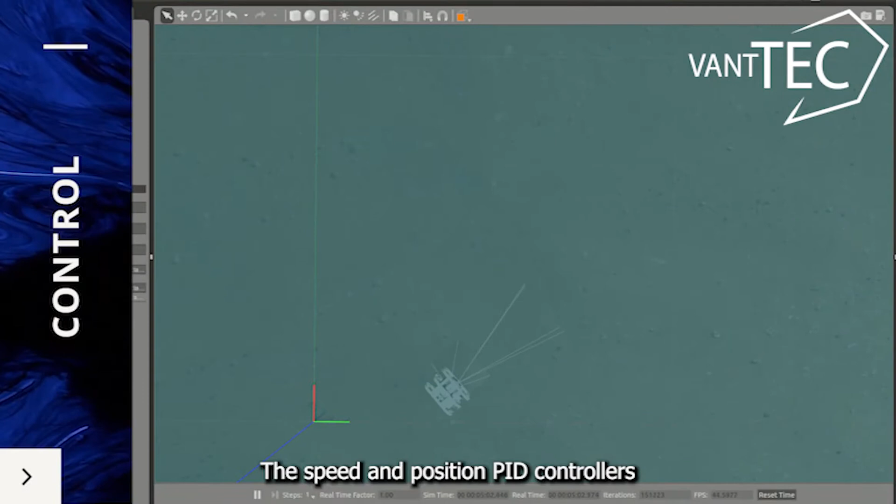The speed and position PID controllers remain in charge of the vehicle's motion control. This system will rely on an IMU VN200 and a Bar30 pressure sensor for position and velocity feedback. The perception system is achieved using two main sensors, the ZED mini stereo camera and a Raspberry camera module V2, positioned at the front and at the bottom of the UUV, respectively.

The perception system has two functional object detection methods which can be used at the same time according to the task. The first one is YOLO, a convolutional neural network trained to detect competition props using the input image of the front stereo camera. And the second one relies on the ZED mini 3D point clouds to identify props depending on their shape.

To accomplish the handling of peripherals such as the hydrophones, the leak sensor, and the depth sensor, an STM32 unit was acquired. The STM32 microcontroller was chosen for its computing power, sampling precision, and large number of programmable pins. The embedded system achieves a multi-threading environment in one single processing core by using a FreeRTOS environment.

The tasks are done by one or multiple threads, and the system scheduler manages them for a correct operation. Each sensor has its own task where the received data is interpreted and, if needed, a response is given.

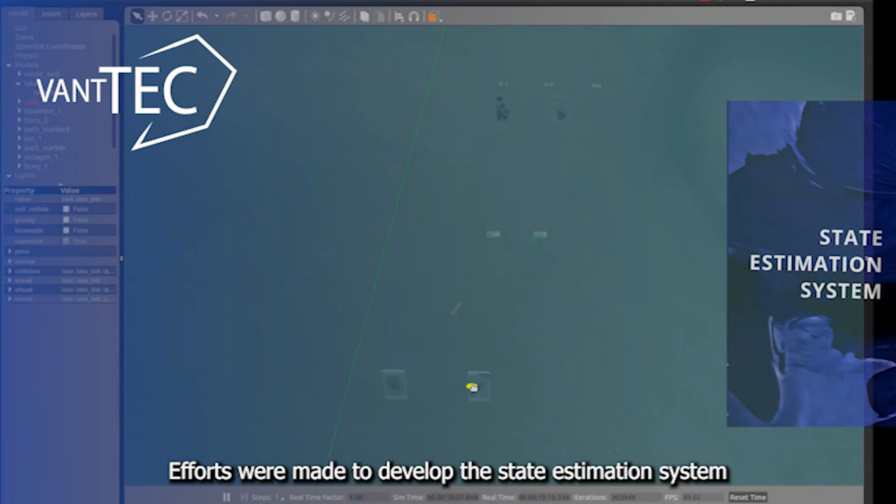Also, due to limitations caused by health concerns, a simulated environment was developed for testing, which we will further talk about in the next developing and testing segment. Efforts were made to develop the state estimation system for the vehicle with said simulation environment, but for a number of reasons, the project was not completed, although it does not present a big concern for this competition.

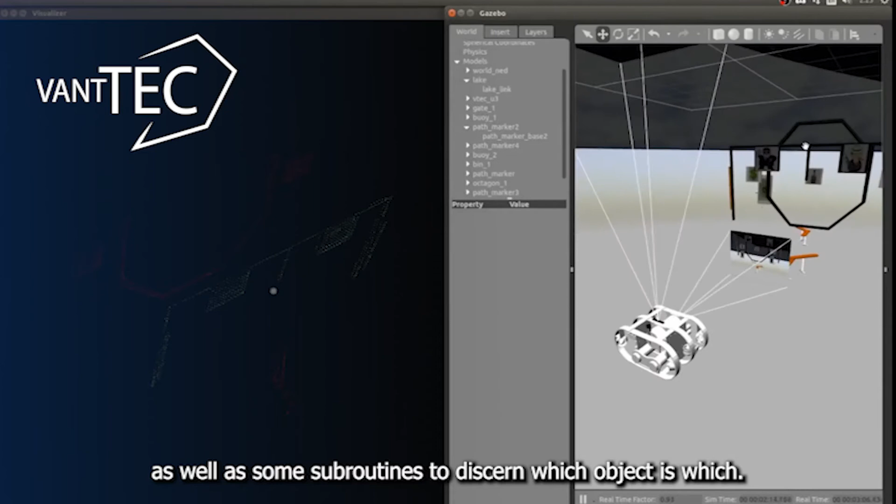To increase precision of the detection of game elements such as the buoys and the gate, we implemented a Euclidean clustering algorithm configured specifically for our needs, as well as some subroutines to discern which object is which. The resulting routine is a fast, low-cost approach to detect three-dimensional objects.

As for the projectile targets, we used a fast color thresholding method to acquire objectives swiftly. We leveraged the difference in relative position of each target to identify them, since the circular hole is always on top of the polygonal one.

Last year's approach for the YOLO neural network relied on training based on a synthetic dataset. But when we tried to test that network on the simulation environment, we realized that it yielded poor performance. For the previous reason, a new dataset was created based on the simulation environment. That approach was chosen first, as access to a pool was not possible for a real dataset.

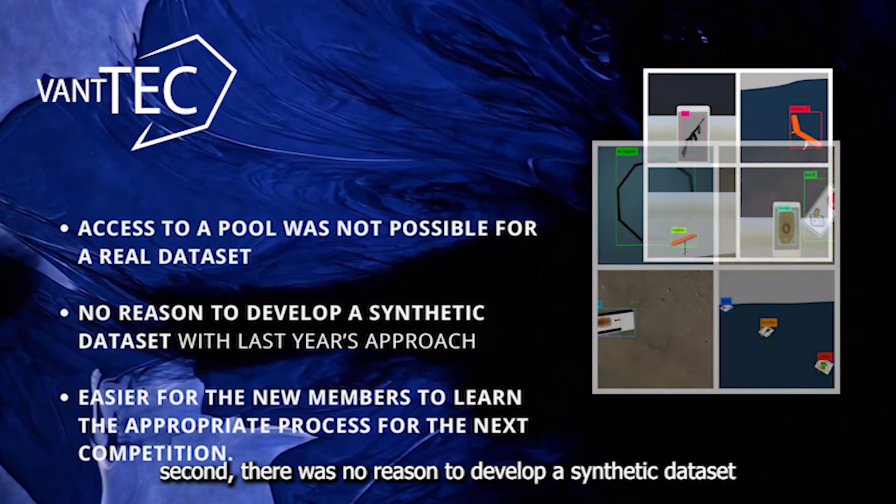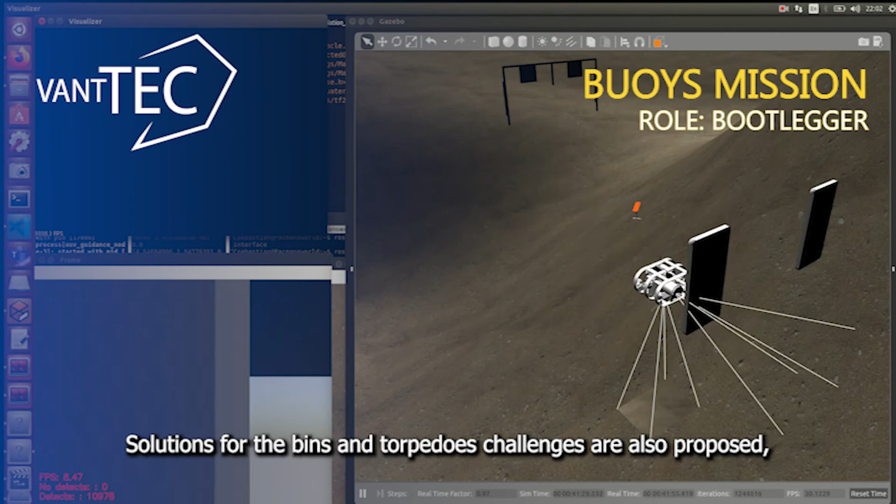Second, there was no reason to develop a synthetic dataset with last year's approach, as no physical competition will take place, and third, it was easier for the new members to learn the appropriate process for the next competition. The final objective for this competition is to further validate the gate and buoys challenges, as well as the path marker guidance, mainly with a new perception system in the simulation. Solutions for bins and torpedoes challenges are also proposed, but further validation with the perception system is required.

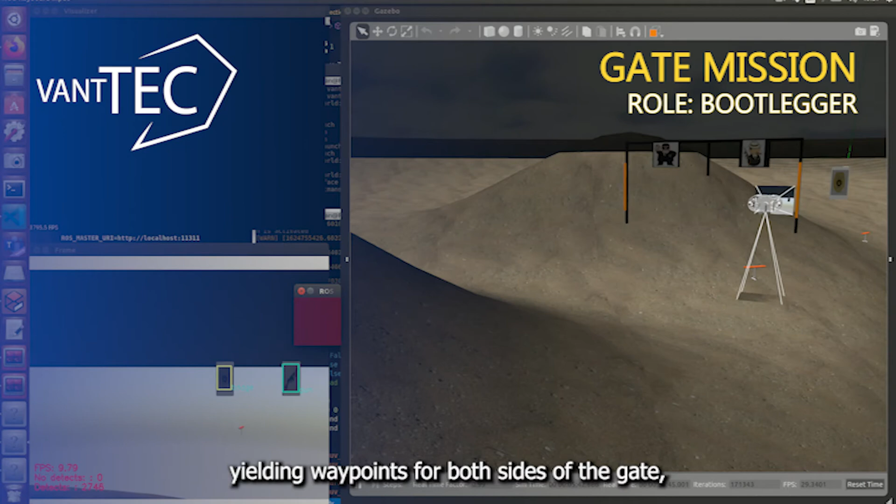The developed perception system proved enough to complete the gate and buoys challenge. The system is capable of detecting the gate and buoys through the processing of the stereo camera point clouds, yielding waypoints for both sides of the gate, as well as waypoints for each buoy. Afterwards, the YOLO network provides the chosen waypoint to the guidance system, depending on the function of the UUV.

Also, a detection method was developed for the path marker following, where the algorithm looks for the characteristic edges of the markers with the bottom camera image. Once the marker is identified, its rotation angle is calculated and used to create a waypoint in the same direction. This method does not require the YOLO neural net, saving processing resources.

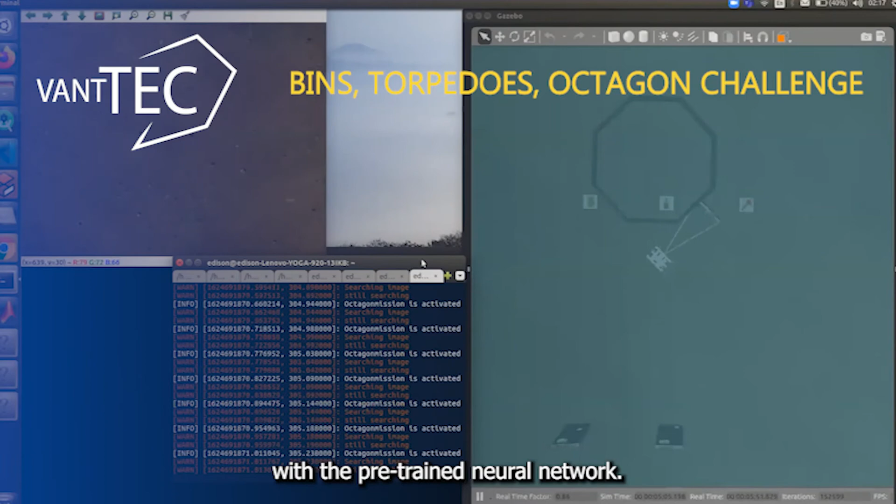For the bins challenge, the robot navigates through the simulated environment until it finds a shape similar to the bins. Once the bins are detected, the submarine will position itself between them. Later, the submarine proceeds to search the required image with the pre-trained neural network. A solution for the mission is proposed, but further development with the 3D perception system is required.

In the torpedo challenge, the stereo camera point clouds are used to detect the rectangle shape of the shooting board. Afterwards, the robot orbits around the board until the neural network identifies the image. Then it remains at that position and shoots the torpedo. The perception system is currently able to identify the shape, the image of the board, and the openings, but further work is required to unify the solution with the perception system.

For embedded systems, the objective was to improve the design from the previous year. Because of health restrictions, the objective was limited to just implement the fundamental sensors and actuators, such as the depth sensor and the motors. In order to leave a window for further testing and optimization, a real-time operating system was implemented on the microcontroller. With FreeRTOS, we can handle the required components while managing hard time constraints and component priority.

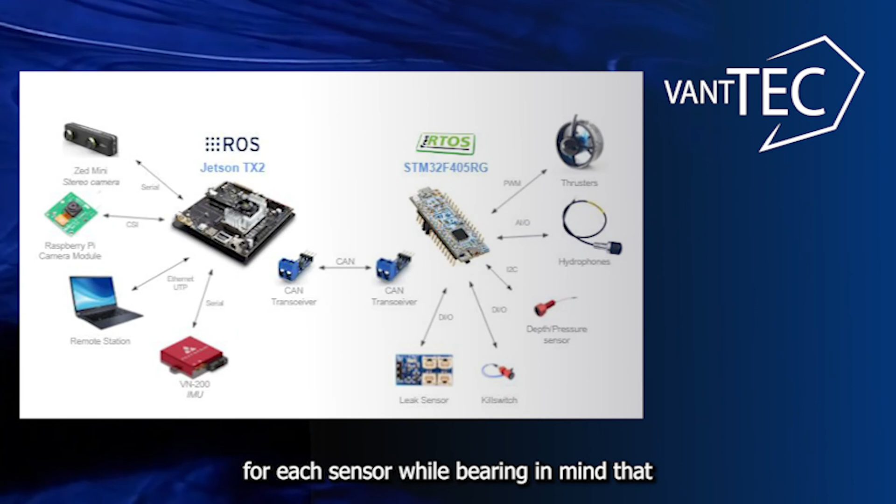With the current pandemic, physical development was not possible due to health regulations established by the state government. In the end, this lowered the worry of developing a complete physical system, so the focus shifted to development in a simulation environment. The development of both the FreeRTOS environment and the tasks was done in the STM32Cube IDE. The approach taken was to develop a task for each sensor while bearing in mind that change and optimization will be needed. The same could be said about the CAN communication protocol we developed this year.

The simulation approach was similar to last year's, and RViz was used as the visualization tool for some mission algorithms in early stages. To develop the perception system, the use of Gazebo was required, as it allows to simulate vision-based sensors such as the ZED mini camera. An IMU was not required to be simulated, as its data could be obtained by using the mathematical model of the UUV. It is in Gazebo where we were able to measure the viability of our mission algorithms and system implementations, such as the new perception and guidance method.

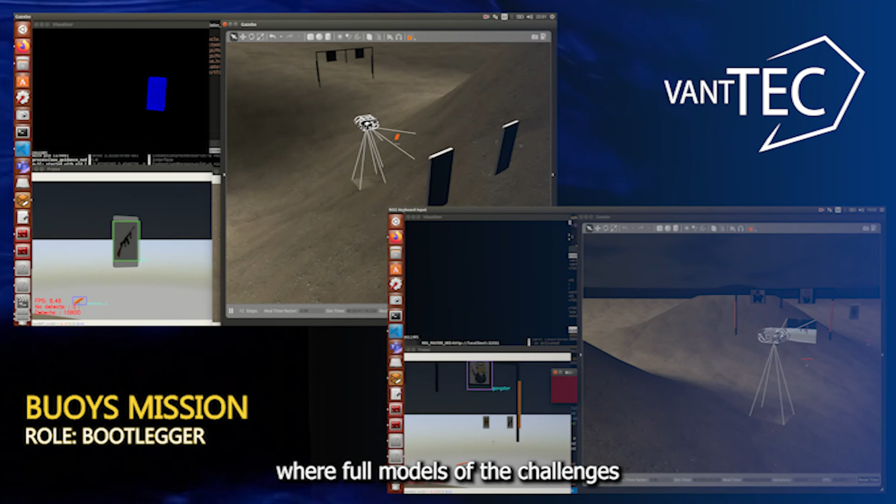Also, worlds in Gazebo were created where full models of the challenges and the UUV could be found to provide our developers an easier and faster way to test their implementations for the designated tasks. The simulation results show the capabilities of the proposed task solutions for the gate and buoys challenges. Results show that approaches for the UUV systems work, but will still require physical testing to completely validate the proposed solutions.